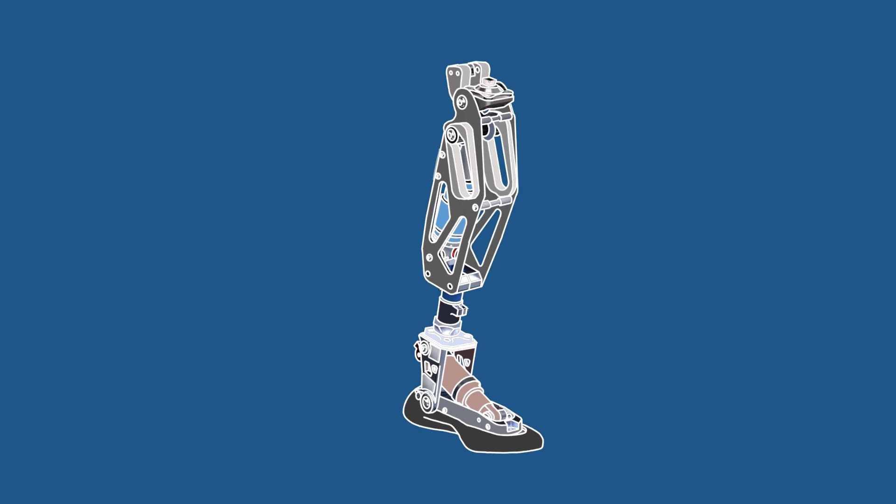You've been considering a solution to manage your SOLIDWORKS data for years, but it's just felt daunting. Hardware investments are expensive, implementations are resource-intensive, and in the end, do you really have the time?

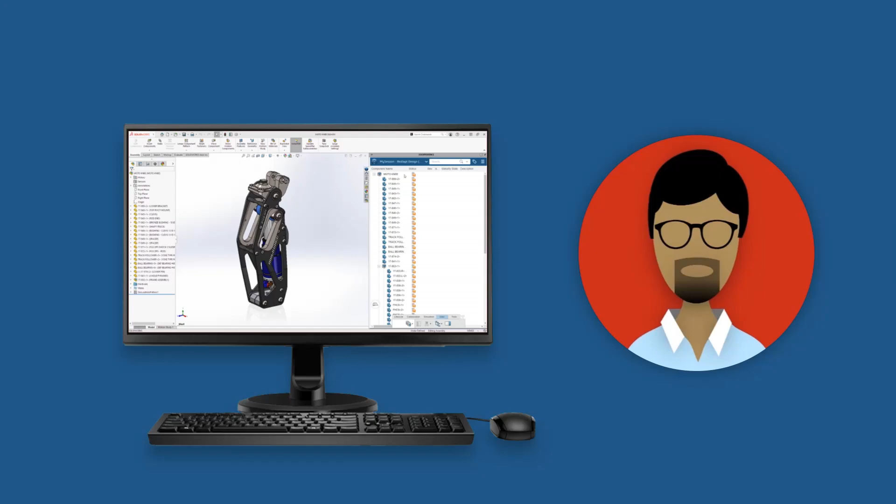Let's see how Eric and his team overcame these common barriers with Collaborative Designer for SOLIDWORKS on the 3DEXPERIENCE platform. With minimal configuration, within minutes Eric is able to begin securely saving his data to the cloud, directly from SOLIDWORKS.

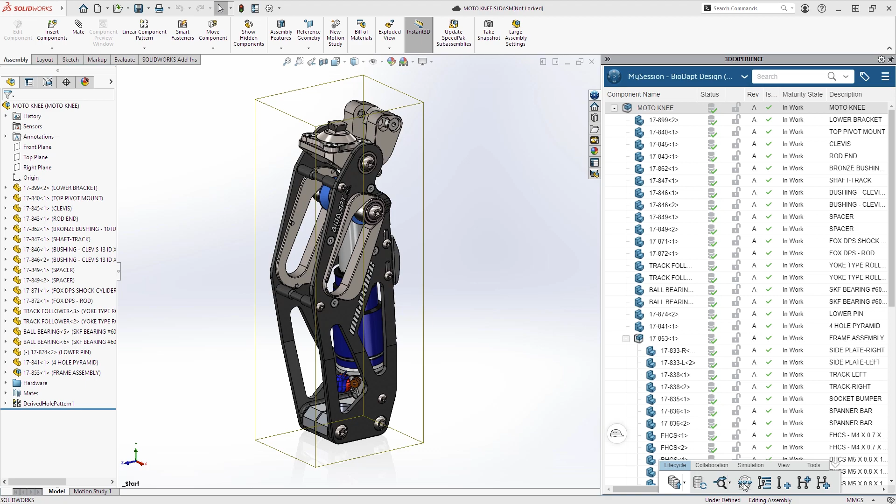Bookmarks provide a familiar way for him to organize and structure his designs, so with a simple save, Eric's design is secure, his custom properties are extracted, and with built-in lifecycle management, he can control design access privileges simply by updating the status.

Without purchasing a single server, Eric's team can now access his designs from anywhere with a web browser.

Pete is in product management and not a SOLIDWORKS user. When he's on site with his supplier to review the product structure, he has direct access to Eric's released designs.

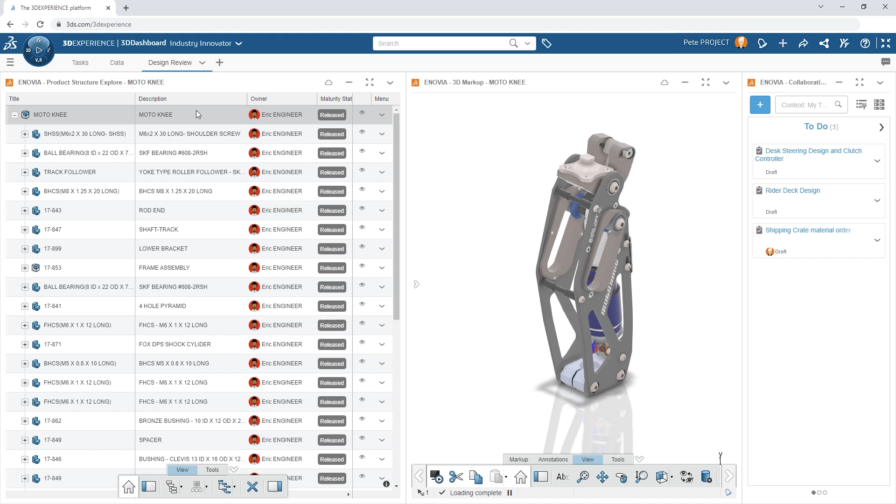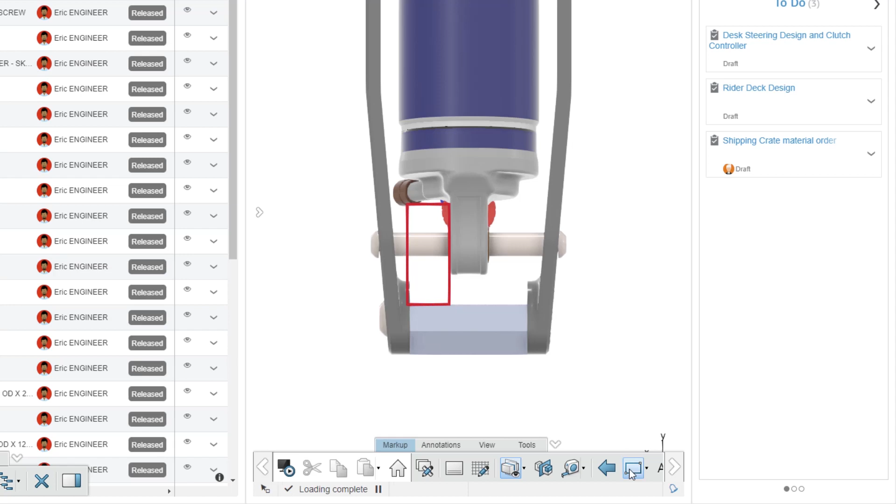With the help of tags and filters, he can quickly visualize those parts that will be made and those that will be purchased. When Pete's supplier provides him feedback that can improve the design, Pete captures the ideas in a markup. Redline sketches on the model help convey that the lower bracket could directly support the piston, reducing the number of parts and strengthening the overall design.

To get the feedback to Eric, Pete used to send emails with a few napkin sketch attachments. Now, he simply creates a task, assigns it to Eric, and drags and drops the markup and assembly onto the task, streamlining their design feedback and collaboration.

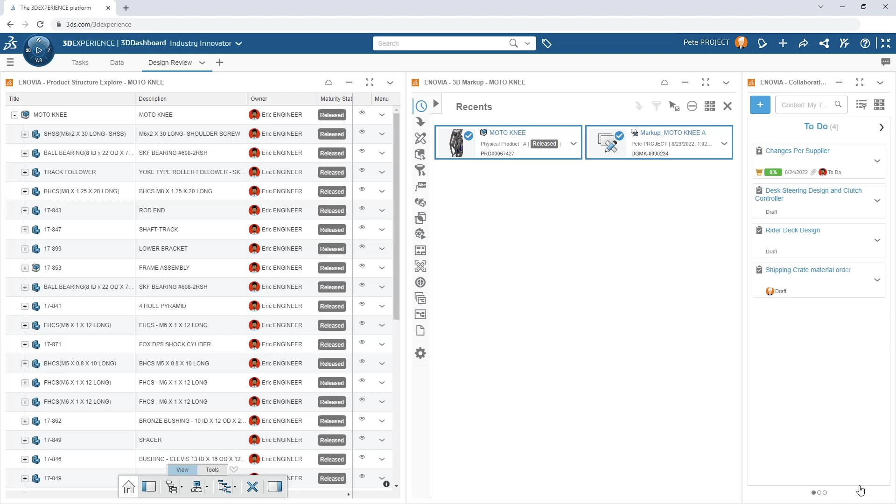Back at the office, Eric is able to access Pete's task right inside of SOLIDWORKS. He updates the status, and then opens the assembly with a simple drag and drop. The assembly is brought local to his machine, ensuring optimal performance. Opening the markup in the task pane provides Eric a convenient reference to the changes he needs to make.

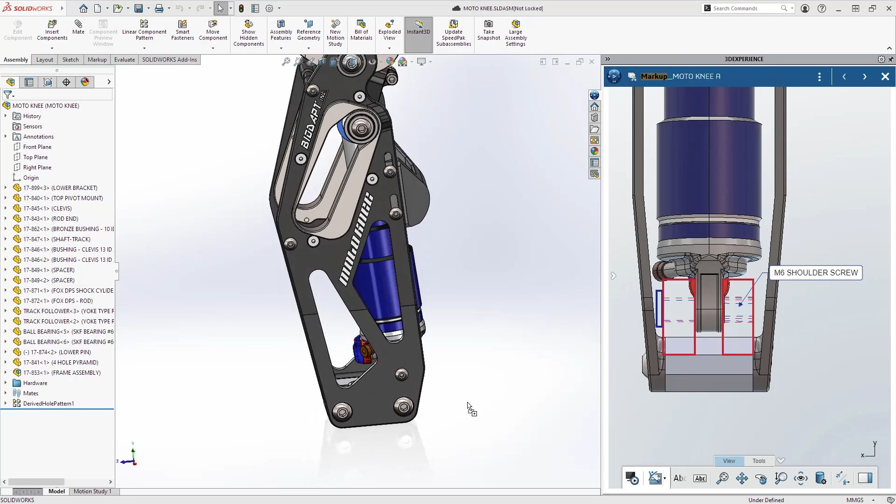Eric would have traditionally spent a lot of time renaming and replacing files to represent the new revision. Now, he simply bumps the revision on the affected part and assembly, and the references are managed for him. He modifies the geometry as requested by Pete, and with the help of integrated search, finds just the right piece of hardware to finish the task.

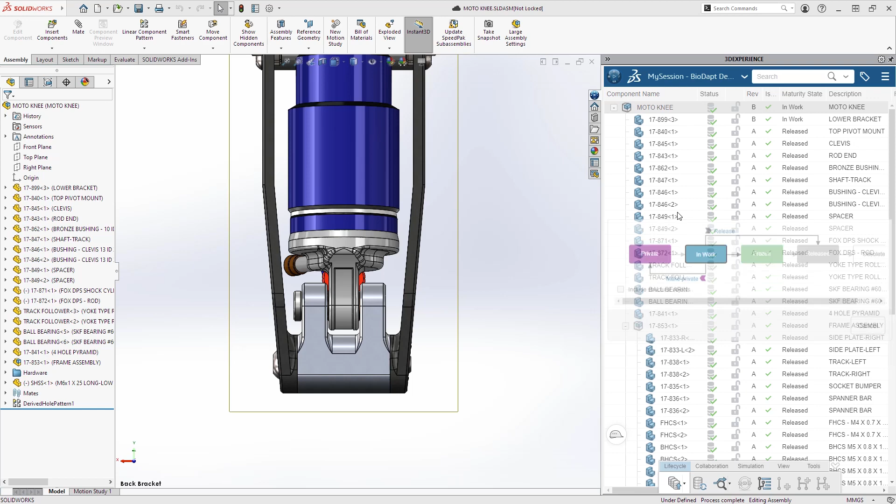With the changes made, Eric updates the release status of the design and finalizes the task.

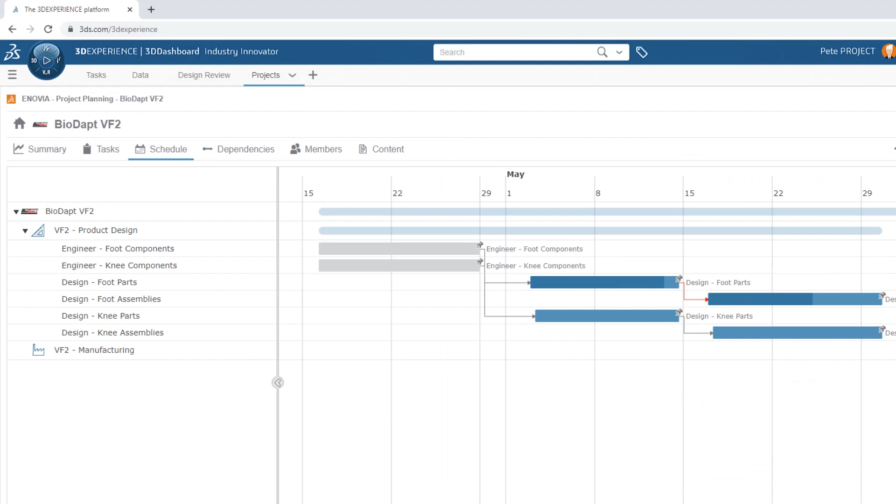With Collaborative Designer for SOLIDWORKS, managing and collaborating on your SOLIDWORKS data has never been more accessible. And as your needs grow, 3DEXPERIENCE Works will continue to help you overcome barriers with connected change management, project management, and release management. What barriers to design collaboration will you overcome with 3DEXPERIENCE Works?